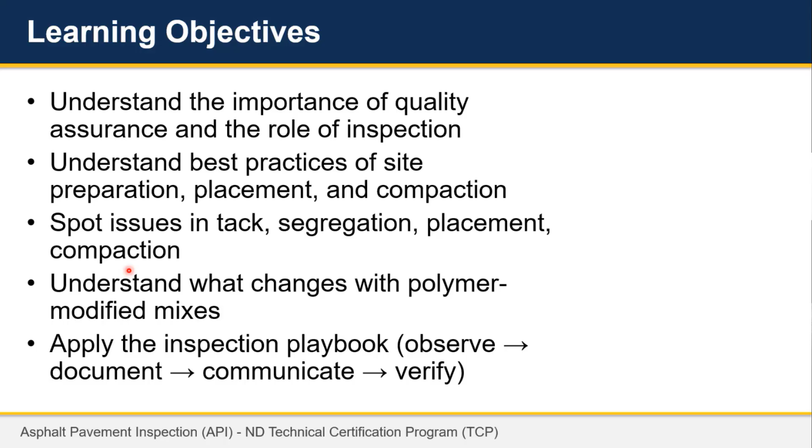So let's start with the role of inspectors, or what is this whole quality assurance thing? Why do we have to test? Why do we have to inspect? Why do we have to do all this?

I think this is important because many of you, especially those with 10 or 12 years of experience, haven't been around long enough to think about what these specifications or systems were like before we did it this way. Quality assurance and inspection are all around for good reason.

If we go back in history, a lot of the interstate system was built under method specifications. That means the agency, the owner, DOT, whoever it is, told the contractor exactly what to do, every step of the way - pretty much ran the contractor's plans, told them, okay, turn the wheel, I want to do this. Essentially they were renting the equipment and the people to run it - the owner was making all the decisions.

What was found is that wasn't really the most effective way to do this. It didn't balance risk between the owner, the agency, and the contractor. If the owner said do X, Y, Z and it resulted in a bad pavement, the owner owned it at that point - I told the contractor what to do. You can't hold the contractor responsible if you told them what to do and then don't like the outcome, and a lot of that was happening.

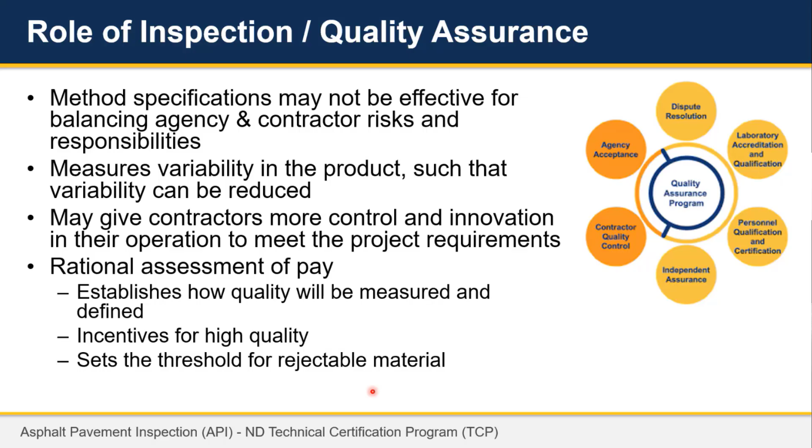What I like to note is that inspectors, quality assurance, acceptance, quality control, all of those items are not just for the highway industry. They're not just for DOT jobs. Quality assurance is widespread around the world in almost every single industry. It's not something we dreamed up, or Federal Highway or DOT's dreamed up.

What makes us different, and I think this is important to think about why we do some of the things that we do, is that our construction industry, whether it's concrete or asphalt, whatever it is, our paving industry is different in two major ways. And the more I think about this, I'm thinking about a third that I'll add.

Number one, we have higher variability in the materials that we use. When I talk to my kids, paving is taking rocks out of the ground, mixing it with this black sticky stuff, and I joke with them that it comes from dead dinosaurs. Not really, but I think it's funner to think about asphalt as dead dinosaurs. Mix it together in this big hot mixing place and smear it all over the ground. Explaining that to a 6-year-old isn't too far off from what we're actually doing.

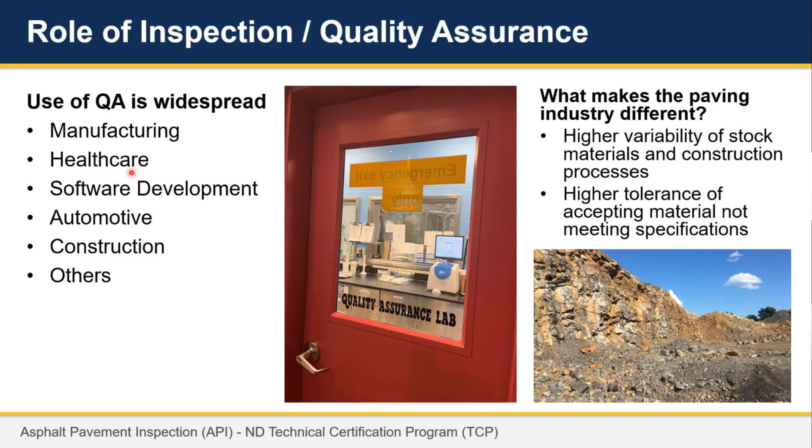I know I'm beating this to death, but I think it's important to take the big view of the big role that you play in this entire process. Inspection is critical to assess a number of things, and I generally break it into three things. The reason why inspection has to be there.

Number one—I'll go a little bit out of order—people think of the quality of the product, the quality of the asphalt pavement. Certainly, as an inspector, that's why you're there: the product itself, the pavement that's going down, but also the quality of the process. We're going to highlight a number of things where the process matters when you think about the common pitfalls I'm talking about. Often it's the process that matters, which I couldn't tell from the product at the end just by looking at the pavement. I wouldn't be able to tell these things.

And then finally, because many of you work on federal projects, we don't just bid one road—bid me a price for one road like you would a driveway. We're paying by the ton, by different quantities. The inspector's also there to verify the quantity of the product so that the pavement doesn't end up being put somewhere else.

You're also there to identify reasons for some deficiency or defect, something that happens. I'll harp on this a little later because in my years of doing this—though not close to some in this room who've been doing it much longer—I have rarely seen being on a paving site for more than four hours without something happening. It may not be the fault of the contractor, but something seems to always happen.

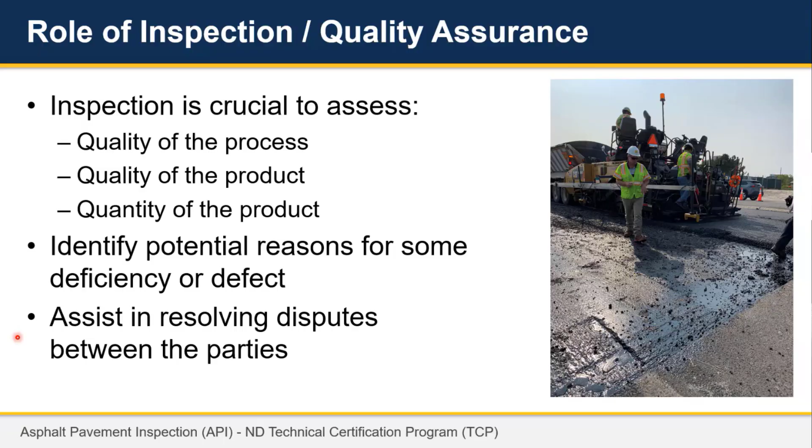The other reason it's good to have an inspector on site is to have an owner's representative there, so when something does happen, there's someone who can make a decision about how we're going to handle this. We're coming up on this intersection, we have to do X, Y, Z, traffic's a mess—there's someone there who can make that call.

So inspection and quality assurance—we have QC and agency people. Mostly agency inspection people here, but QC, contractor representatives doing the work, also have inspection roles for quality control. Their production and field staff are always doing inspections. It may not be as formal as the owner's, but someone at the plant is looking at piles, looking at the plant, making sure things are running consistently. So prior to production or placement, during production and placement, and then after. And if we have these eyes, let's use them.

For the owners or the people representing the owners, you're conducting inspections. What are you looking at? You're monitoring the contractor, who's doing contract quality control. I view that role as a service—you're paying for it. So you monitor, review acceptance tests, the things I'm doing as the owner to see how much to pay for this, what the quality level is so I can pay for it, and then monitor production and construction activities. I find formal inspection reporting should be provided at least once daily for every major operation.

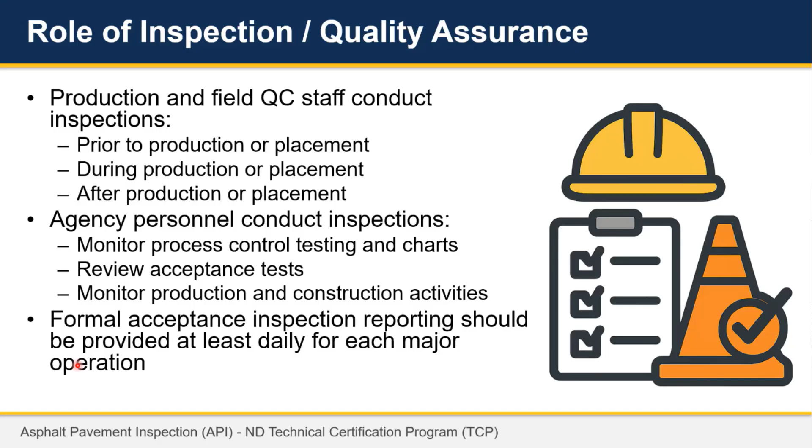So what are some of the best practices? I'll throw this out for inspection, no matter what you're looking at, even if it's something like concrete: break it down into observe, document, communicate.

Observe—you're there. You're being compensated to be present, to watch for things because you know what you're looking at. That includes the material itself, the process by which the material is being placed, and the results at the end. As an owner, you're comparing that to my specification requirements—the spec is what I expect out of the contractor.

You're also there to document and communicate. I find observe is what most inspectors do. Document and communicate—these two are where maybe sometimes we fall down a little bit, generally as an industry.

Document means objective facts: time, temperatures, quantities, locations—where am I on the road. My ex-colleague at Federal Highway used to say: tell the story of what happened that day, not the end result.

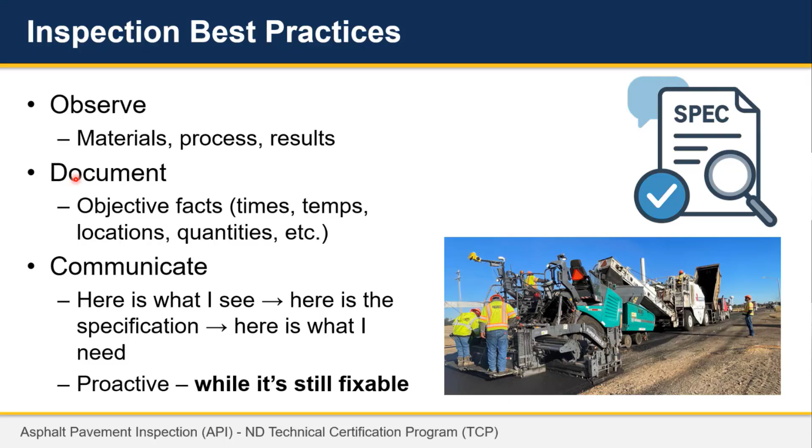What I like to tell people is take your bid price for mix per ton and how much money is being placed every single hour. What's the value of that is going down? We want to be proactive and fix stuff while we can. We are limited once it's laid, but we can still make adjustments so it doesn't continue all day. So observe, document, communicate back to the contractor, especially for you agency inspection folks.

Take a picture, call the paving foreman, discuss the issue immediately. I like those. So when I thought about this, and you can keep adding in there, thanks Tom.

Thanks, Josh. Number one, notify someone. I see something, let's call the foreman, someone who's in charge. If they're not there, woohoo. You see this, this is an issue. So I'm going to notify somebody first. Why is that first? Because I'm still paving. This paver was still going. It was still laying down stuff I didn't like. So let's do that first.

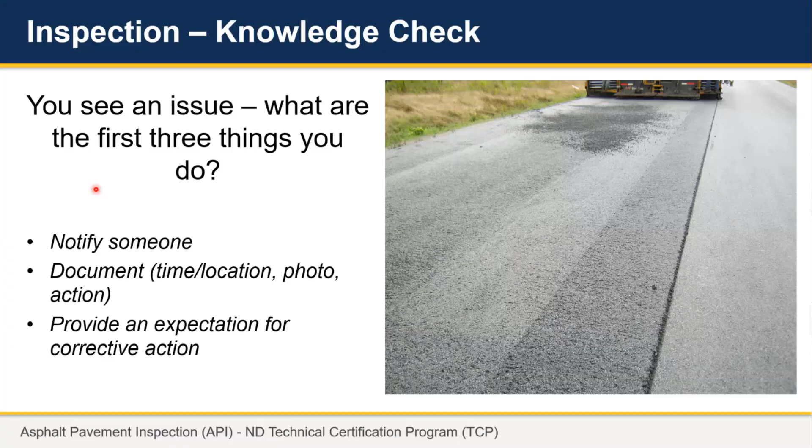So that's my spiel about inspection in general. Now I want to get into some specific areas - tacking, placement, compaction - and I'm going to focus on the areas where I think we've seen the most issues.

So I have some North Dakota pictures here. I know they're North Dakota because, again, I'm from the Northeast - I see absolutely no trees. Different for me, but different parts of the country.

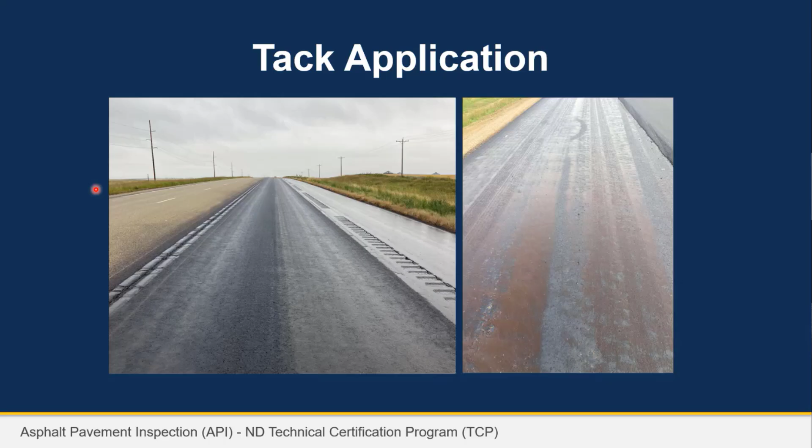And what do we see with tack applications? Now, I do like to hit this relatively hard so everyone understands why we often teach and are a pain about tack coats. So what is a tack? Everyone here should know this - we're going to spray some asphalt, essentially glue, in between different overlays. Well, why do we do that?

If we kind of back up, I'm going to compare to that white stuff, concrete pavements. Concrete pavements are laid or placed generally in one big lift, right? One 8-inch slab, 9-inch slab, 10-inch slab, whatever it is. It's all one uniform material placed at the same time. We don't do that with asphalt.

If we have a 10-inch asphalt pavement over some aggregate base, we don't often do that in one lift. We may not even do the 4 inches in one lift - we're going to break that down into multiple lifts. Well, why do we do that? For constructability reasons, or we often use different mixes to save money where we can or to achieve some amount of performance. But we call our asphalt pavements flexible pavements because we want them to be flexible.

The thing we need is for all the layers to work together as one system - they need to be bonded, right? So this is where I show a screenshot from an excellent YouTube video that Marshall Klinefelter did when he was at the Maryland Asphalt Pavement Association.

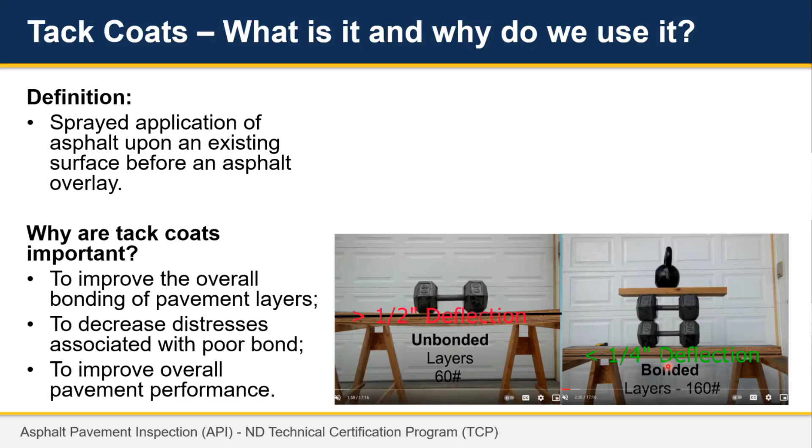And that's how we get cracking. That's why tack coats matter. We need these things to be glued together because that's how we design them. If they don't get glued together, then we have issues.

We also have issues like this, a surface that doesn't get bonded to what's beneath, and it blows up. It's a small cost, such an overlooked item. As an industry, we need to do better. That's something I can't tell from the final pavement. I can't go to a pavement that was paved yesterday and figure out whether it was tacked well. No idea. I got to be there, I got to be an inspector, and then we'll see that.

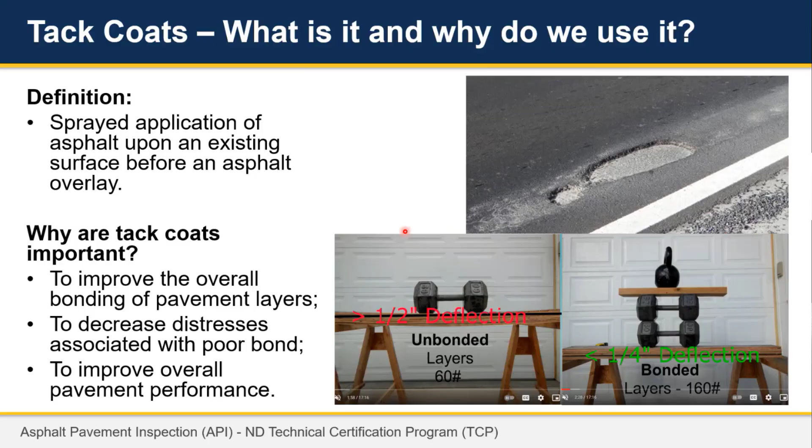So just a reminder of terminology. I think you're going to get all these slides, that when we are using emulsion, tack emulsions, we have undiluted and diluted emulsions.

What is an emulsion? It's the brown liquid, whatever it is. What is it made of? Asphalt and water and agents that emulsify it. Why do we use emulsions? It allows us to spray asphalt at lower temperatures and also put a small amount on well. The equipment doesn't do well, our sprayers etc., when it's a small amount. It allows us to spray more, work it easier, and what happens is the water and all of these agents disappear, they evaporate. So I'm left with just the asphalt glue on an existing surface. So this is an undiluted emulsion.

If I dilute an emulsion, which means just add water to it - if I add water to this 65% asphalt emulsion, now look how much asphalt is in it. I'm going to be honest, Derek, opinion alert - put the warning up - I hate diluted emulsions. It makes it very confusing because what it changes is the amount of asphalt in this liquid. So when this is sprayed, I don't know how much asphalt is in it.

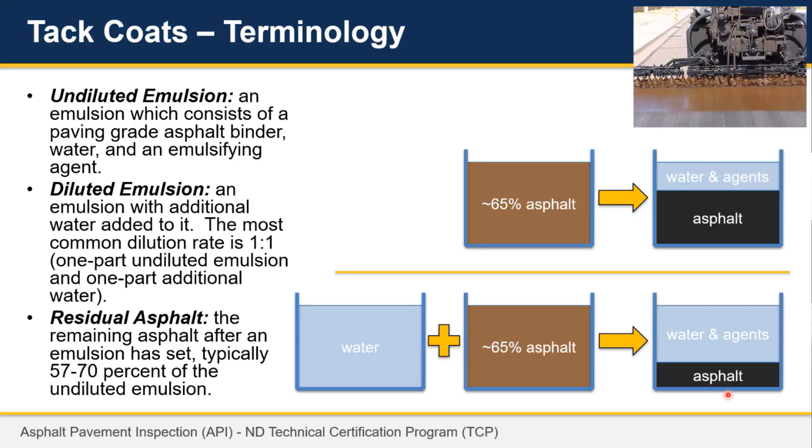This water and these agents do nothing for me, do nothing for performance. It's all about getting it on the road. And I understand it's there for a reason, it makes it more sprayable, etc. But when I don't know how much asphalt - that's the residual asphalt, that's actually the glue - the rest of this stuff doesn't give me any gluing, doesn't help my performance whatsoever. So when I dilute an emulsion, it makes this an unknown. I don't know it as well. If it's an undiluted emulsion, at least I know where it stands.

So what is going on when I spray tack? Again, for those of you that have done this a long time - I'm going to spray the tack. Okay, I'm going to spray it. The water, the agents, and the asphalt is going to be there. It's going to look brown. Eventually, what's going to happen is the asphalt is going to migrate down to the bottom of the tack and get on top of the surface. The water and the surfactant agents are going to come up.

That's tack coat break - the moment when the water separates enough from the asphalt and it shows that color change, from brown to black. So then eventually when it's set, all the water and agents are gone, so it's just the asphalt that's left. Some people call this completely broken. This is all a chemical process, actually. There's a pH change, there's evaporation of the water. So there's a lot of things that affect this.

Again, I would seem to get an argument here, but we want the tack to break. We want it to break before paving over it. The asphalt and the water separate out of it, so that when I do pave over it, that water will flash off. It doesn't flash off as well when I spray just the tack and pave right over it - it hasn't done that separation, if you will.

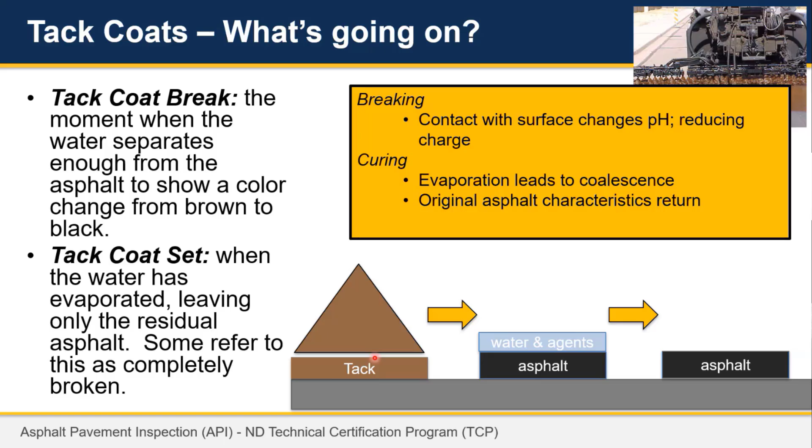These slides are written in a positive tone, but I have to admit, I'm from the Northeast, outside Boston, and I've been accused of having a somewhat pessimistic view on things. So the Boston guy in me wants to say, here's what's going to get screwed up - here's what goes wrong with tack.

So: condition, the amount of tack we use, proper operation of distributor, getting it to break, and then pick up - that's the one I think we fight the most in a lot of areas. Maybe a little easier for you guys since you're windrow paving, so maybe you don't run into that as much, but we'll see.

So, condition of the existing pavement. These are two different pavement surfaces. The demand for tack is going to be different on these - one needs more than the other.

Same thing goes if I were painting or staining a deck. If it's a brand new deck and I'm going to stain it versus a deck that's been weathered for years, the amount of stain I'd need to get the same finished product is going to be different. There's different surface areas, and the amount it soaks in is different.

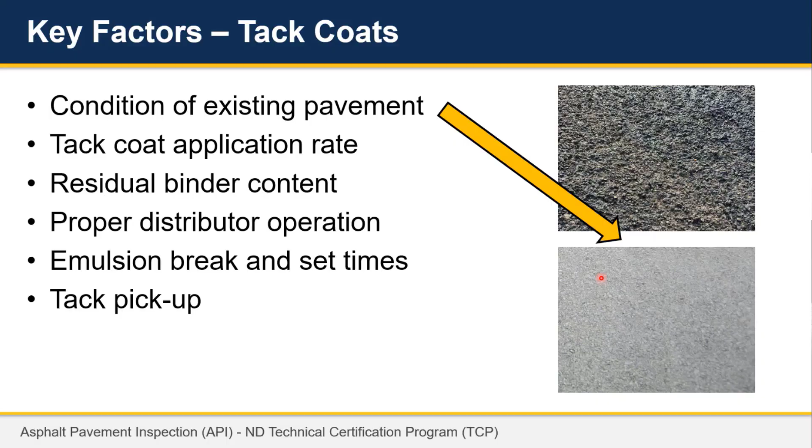We should use different tack applications on these two different surfaces, and think about that, making sure we're putting enough glue that actually matters and gets me the stick I want.

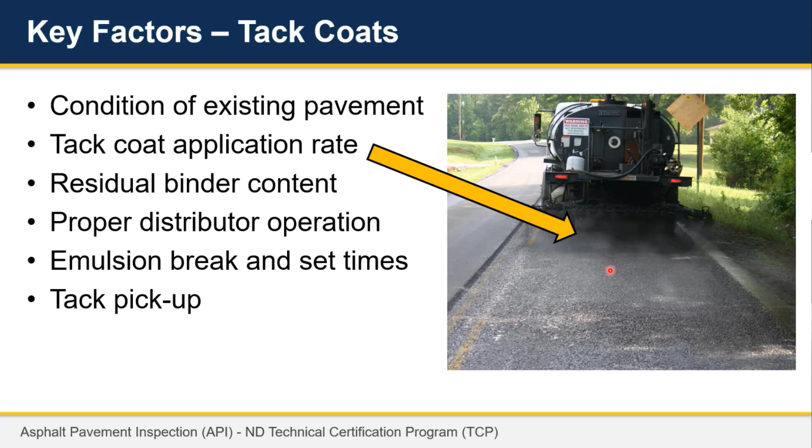And that gets into the application rate. We want the application rate to be fine and enough for the surface I'm spraying. Here's an example that's not - this is a picture I took earlier, this is lightly misting on a very aggressive surface texture, and that's not enough.

And that matters to residual binder content. How much I'm spraying isn't what I actually care about, because what I spray doesn't matter - what matters is how much asphalt is left. So I have to be careful that I know my application rate so I can figure out my residual binder content. We often find some agencies have gone to residual binder content as their spec. That can be hard, depending on if you allow dilution, but that's really what I want to know. So keep that in mind as an inspector.

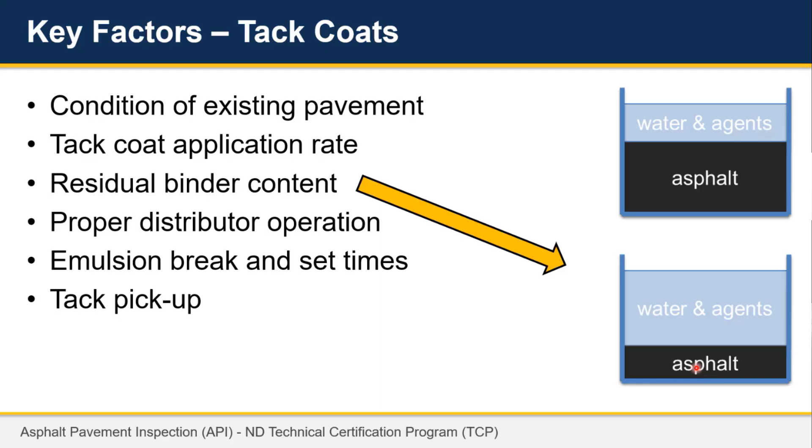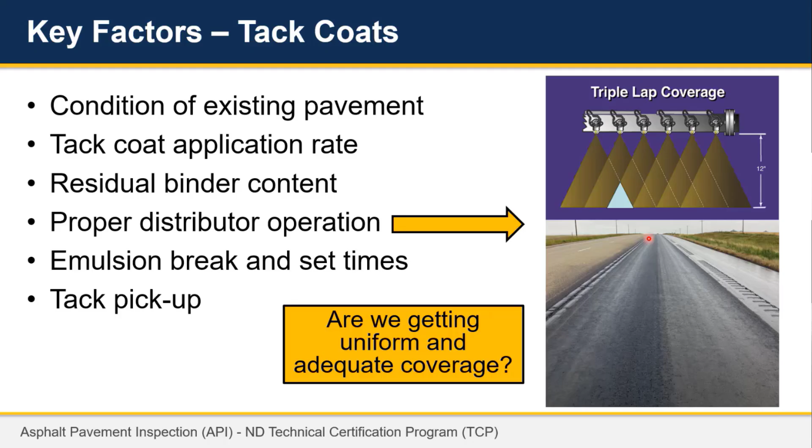Then I can spray it just fine, maybe I put the right amount on, but what if my coverage isn't uniform? What if I've got areas that just aren't covered - not like right here, right in this mess, I got no tack there. So are we getting uniform and adequate coverage? I might be spraying enough, but is it uniform all the way across?

Then, is the emulsion breaking and setting before I pave? Are we allowing it to break? Here's another example, not the best application - we don't want to pave over this until it has turned color. What affects that? Humidity, whether the sun is out, wind - all those things affect it. We pave a lot of times when it's hard to get the tack to break. I'm not going to say it's never happened that people have paved over unbroken tack, but we want it to break before paving over.

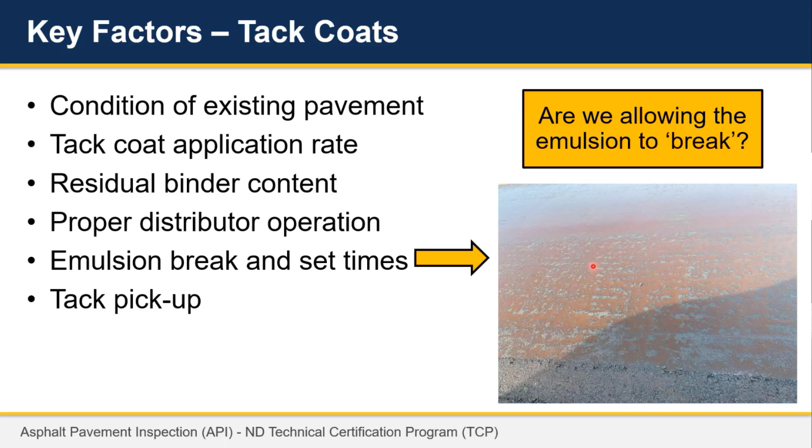And then the bane of many people's existence: tack pickup. You spray it and it just doesn't stay - doesn't stick to the underlying surface. So people say, oh great, you paid for that tack, and it's being tracked all the way off the project. I love the jokes of, oh, the town over here is going to love the seal you put on their road from the tack you just picked up.

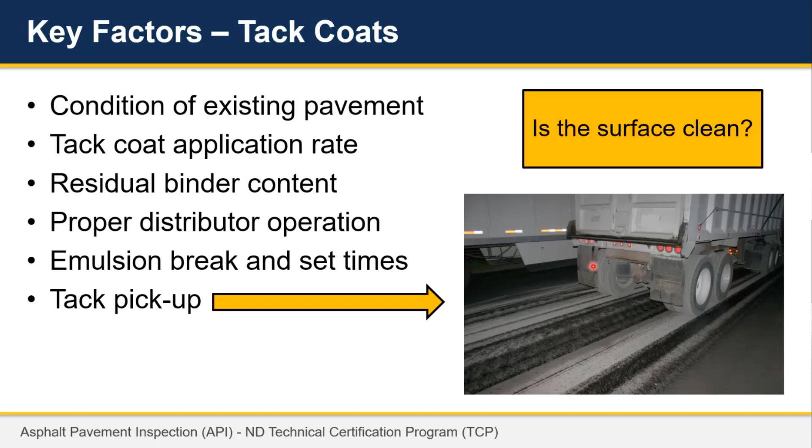It does help if the surface is clean - that's where mill and fills come in. Getting a clean surface is very important because you want a clean surface in order to get this tack to hopefully stick. You can change the materials - that's often a specification issue - but you don't want to see it picked.

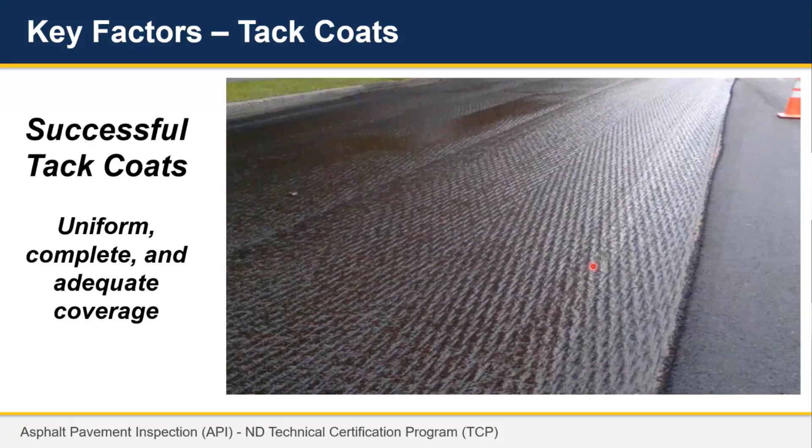So successful tack coats - we want uniform, complete, and adequate coverage where we can. This is a picture where if you look at the milled surface too long you'll give yourself a headache, but I use this a lot as a good example - tack that is broken, ready to pave over, hasn't tracked anywhere. This can be hard to do, but it's important to continue to look at.